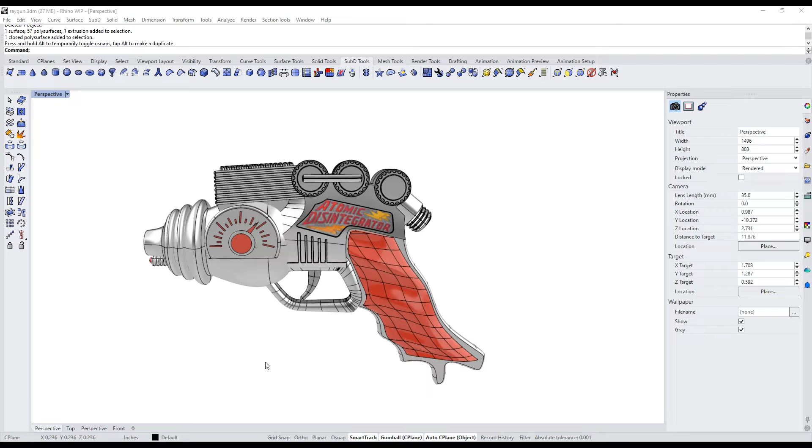Today I wanted to talk to you about one of the more exciting features of version 8, which is Shrinkwrap. I wanted to show you a workflow and how this tool can be used, and basically show the benefit if you're doing 3D printing, and also shelling, which used to be very difficult to do in Rhino, and it's actually super easy now.

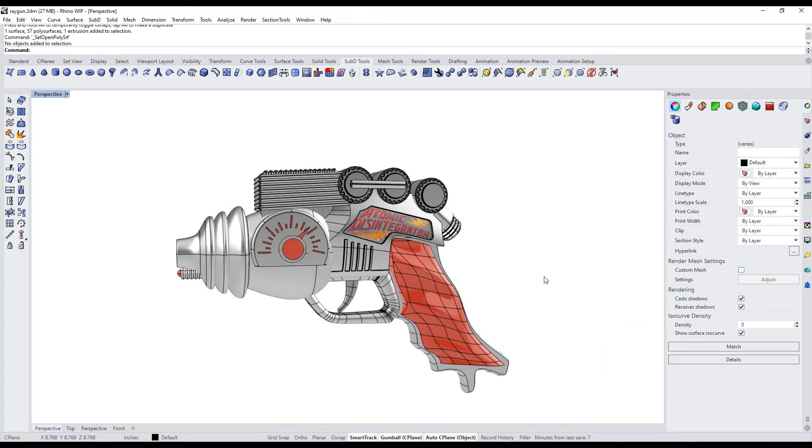So I've got this model, and you may recognize this from the version 7 days. I've dusted it off from one of the rendering videos. And the reason I wanted to use this is because this model's kind of a mess. If I grab this thing and run Select Open Polysurface, it's going to show you that this thing is open.

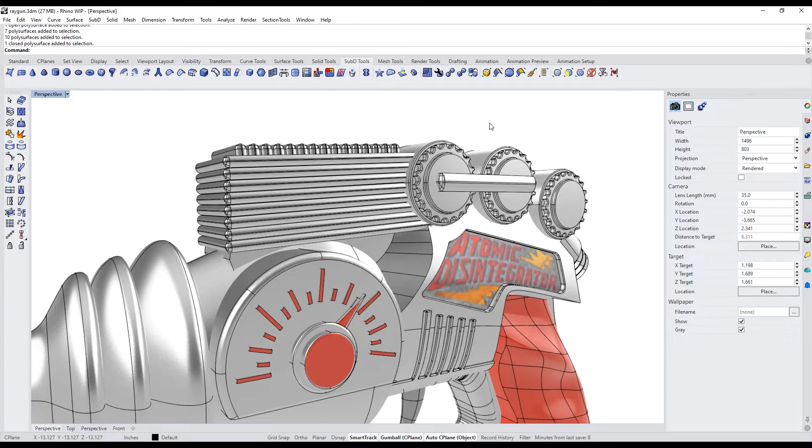It's got surfaces, it's got stuff that's just mashed and overlapping. Showing you a little bit of how the sausage is made here from some of my rendering videos. But this thing is not trimmed. It's got a bunch of overlapping stuff in two directions that I just mashed together for the rendering video, because I never really intended to do anything with this other than just make a rendering video.

But it actually turns out that this is a really good case study for Shrinkwrap. And if I decided at a later date, which I did, that I actually want to print this thing, it's a mess and it wouldn't print right now. I don't like how this thing is set up to do that.

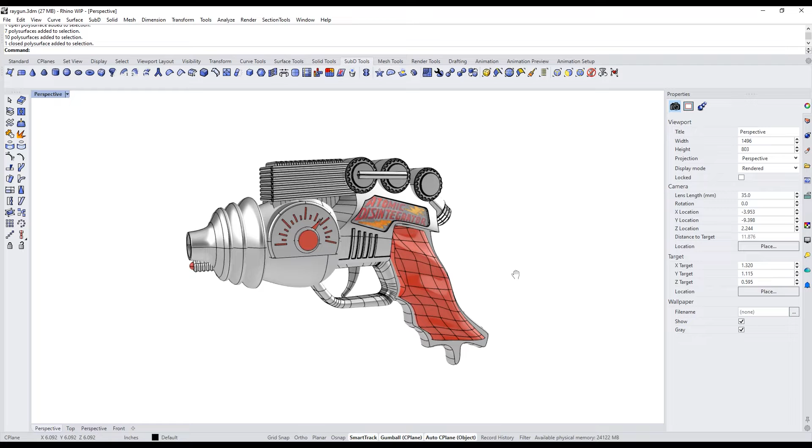So what we're going to do is grab the entire model, and I'm going to switch to shaded mode for this because it's a little easier to see. And we're going to run Shrinkwrap.

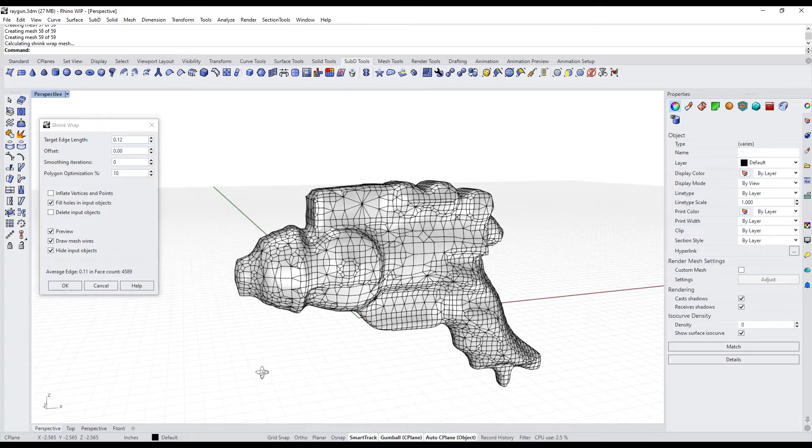It brings up a dialog box. The very first thing I'm going to do is hit preview and let it run, and then hide the input objects. You can see what it's done is made kind of a pile here. This isn't super useful, but the one thing you'll notice is it combined everything together into one piece.

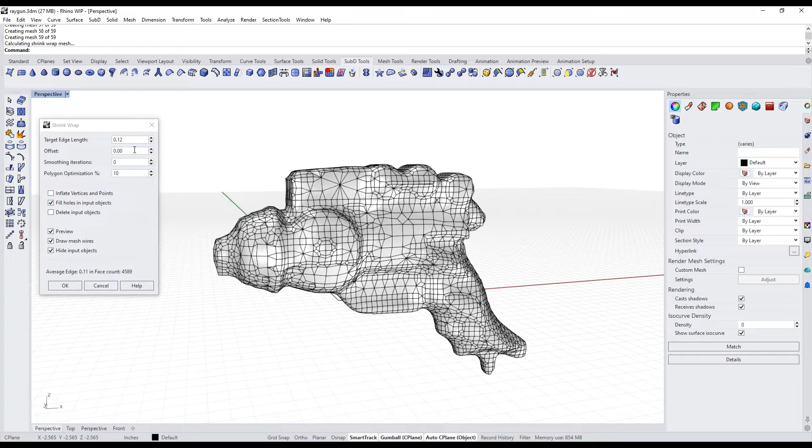So what we can do now is start to refine this. The first thing I'm going to do is actually not fill the holes, which seems a little bit counterintuitive, but I'm also going to crank this down all the way. I'm going to take this to 0.01. This is a fairly small model, so it's something we can get away with.

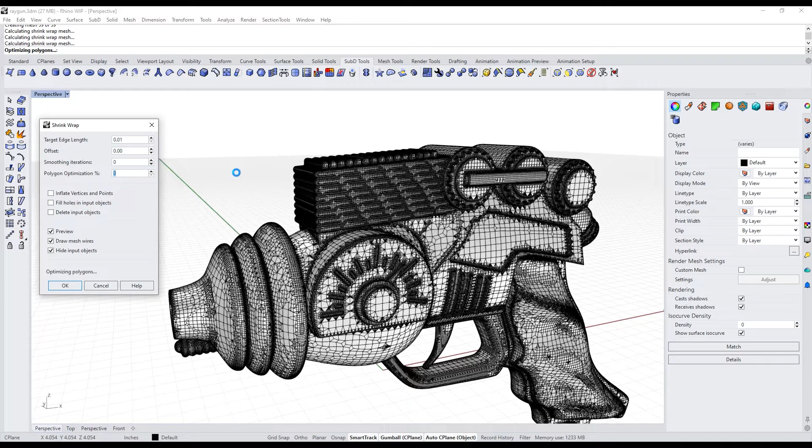And then I'm actually going to take the polygon optimization, which is a decimation, down to 0 because I want the full tilt boogie. I want to see all of the polygons. And we're going to go ahead and say okay.

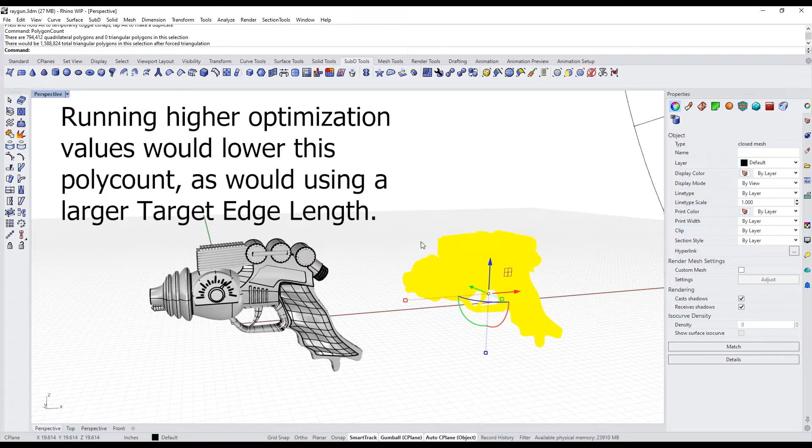Now, the cool thing about this is it actually completes fairly easily. And if we run polygon count, you can see that there's 1.5 million triangles in this part. Now that's rolling a little deep, but it's not out of the realm of any possibility for what any modern 3D printer can handle.

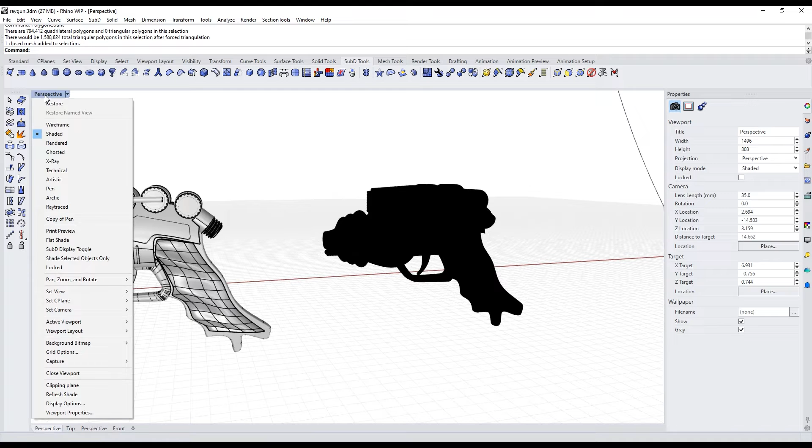We could always run mesh reduce on this. We could always do a bunch of things in order to get that to work. Now, if we go to rendered mode, you can take a look at this, and you see that's actually done a really nice job. But the coolest thing about this is it's a closed mesh. So right now, this chunk is ready to print.

Now, a lot of you may know I spent most of my career in the toy industry, and one of the things we used to have to do all the time with digital models is actually core them out in order to be able to put mechanisms or batteries or speakers, or whatever, inside. And that was always just an absolute nightmare.

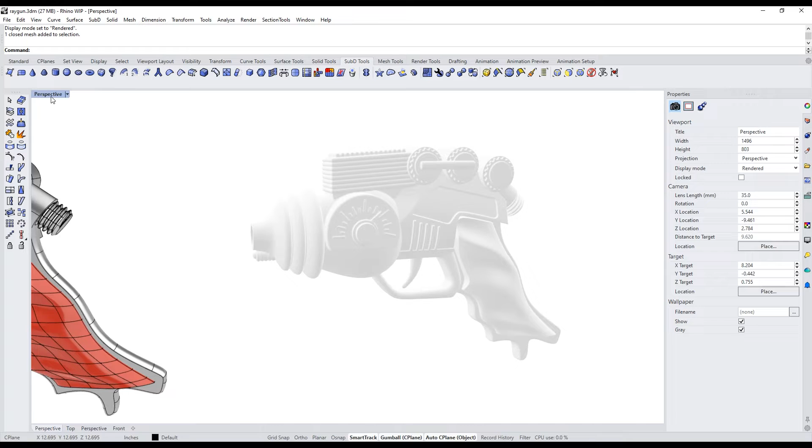In fact, there were tons of workarounds and tricks and all sorts of stuff that we had to do, and none of them were good. Especially in Rhino, this was really, really difficult to do because it essentially meant that you had to go through and individually offset each part, and then individually boolean the thing, and actually make a second model inside a model.

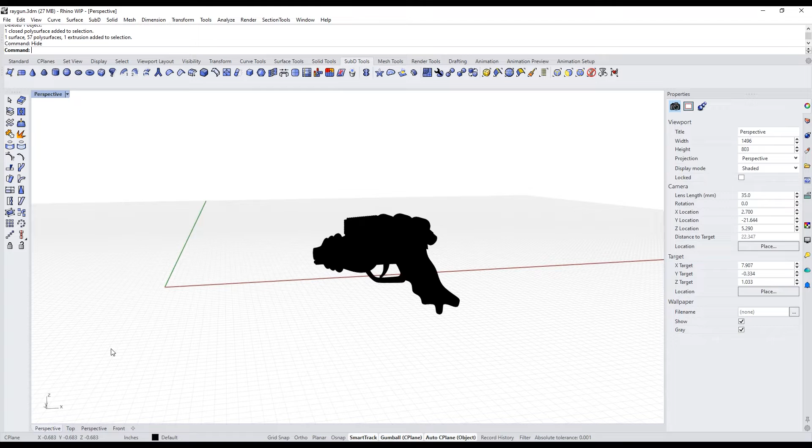Well, in this case, I'm going to hide this guy for now. What we can do is just shrink wrap the shrink wrap. I'm going to shrink wrap this, but I'm going to use the offset, and I'm going to actually offset this negative 0.08, which is about what I'd like to do.

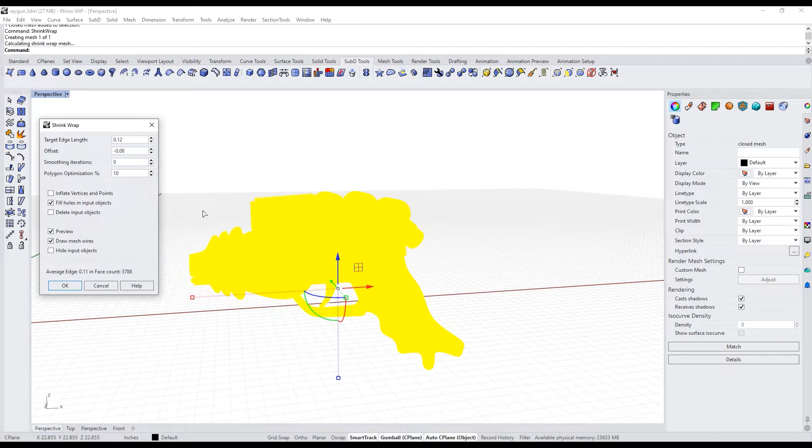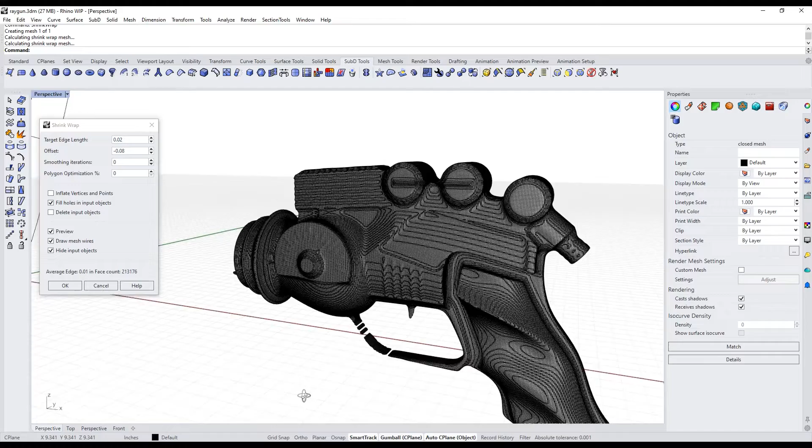I'm going to preview this, it's going to go fairly quick. I'm going to hide the input object, and you can see that we end up right back where we were before. So this is a highly optimized mesh, and if I crank this down to 0, you can see that it starts getting a little better. I can start cranking down or up the detail by making the edge length shorter, and then you see that I get a really good result of this thing as it sits.

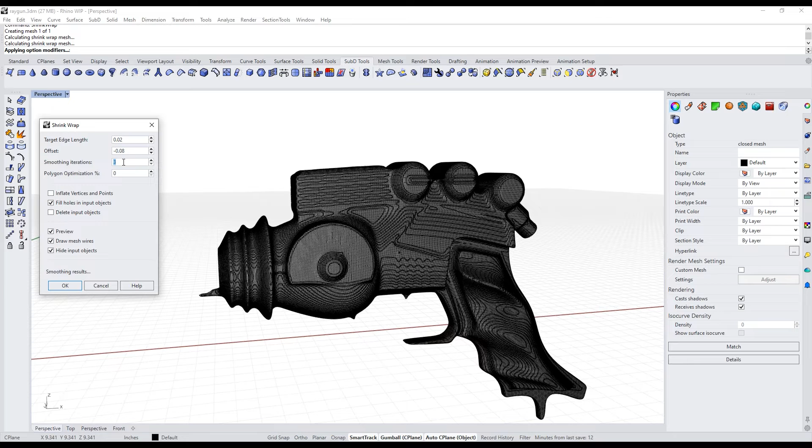Now there's a smoothing tool in here as well, so what I can do is crank this up a little bit and lose a little detail on the inside, which is fine — that's actually not a bad thing as far as what I want to accomplish. I'm going to go up to like 2 or 3, and I may add a little polygon optimization in here just because I don't need quite that much detail. I'll leave fill holes off again, and let it run.

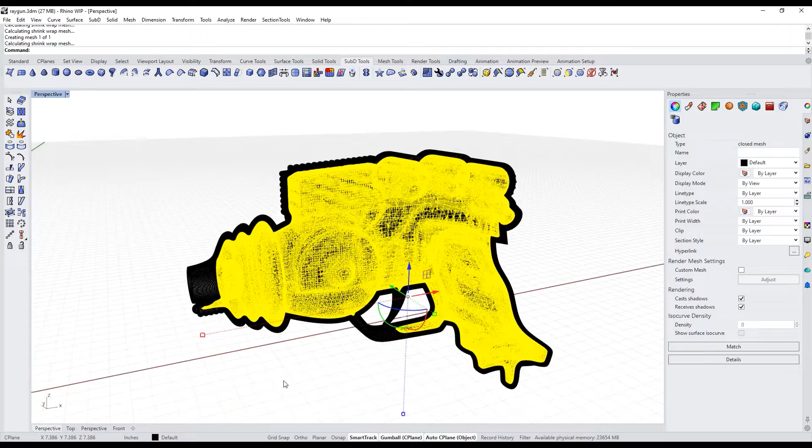So what you can see is I end up with this offset of my offset. Now, the last part of this...

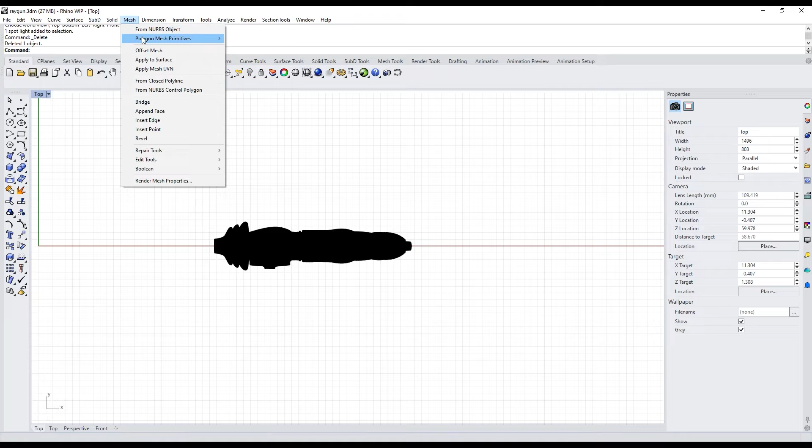Party trick that shrink wrap has is if I go into the standard toolbar and grab a mesh box — actually I'll do this from up here, grab a mesh primitive, and just do a box. I'm going to do it from 0, drag it out here, go to the front view, make it taller, and make sure that it intersects like that.

The other thing that's cool is that mesh booleans have been rewritten for Rhino 8, and they actually work now. Hooray! I'm going to come in here and grab a mesh split, and I'm going to grab this, the outside — I want to make sure I'm grabbing the outside. I'm going to split this guy in half.

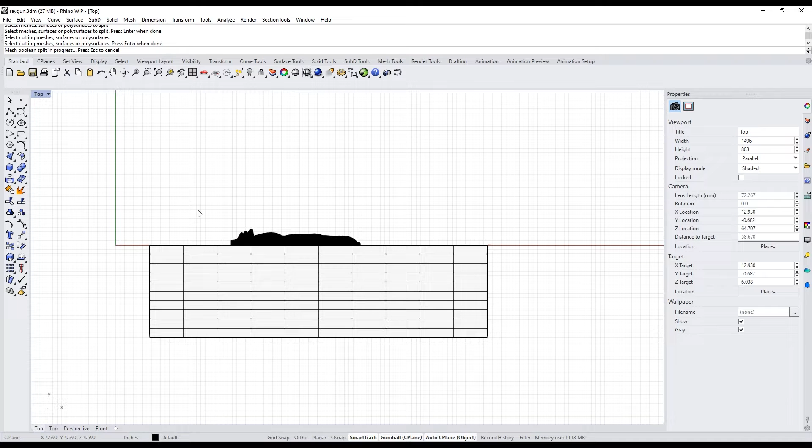And I think you can probably see where I'm going here, but wait for that to finish. I'm going to delete my box, and I've got two halves. Now I'm going to hide one half.

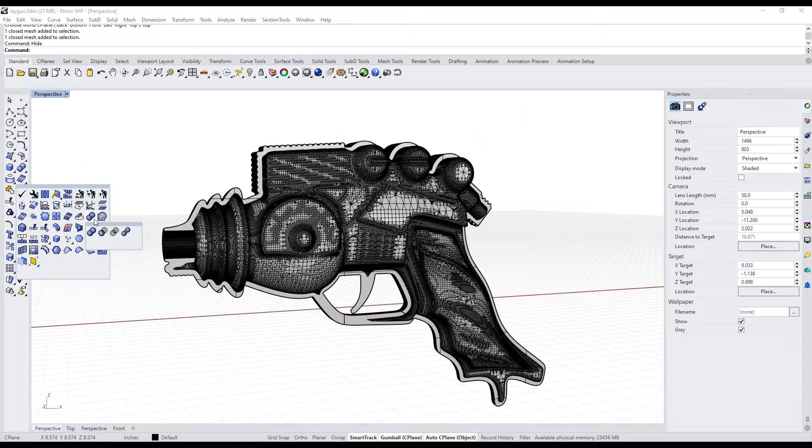You can see that the offset, I can check it, make sure that everything looks lovely here. I'm going to go and do a mesh boolean difference. I'm going to remove the inside from this. I'm not going to delete the input because I need to use it for the other half. It's going to think for a second.

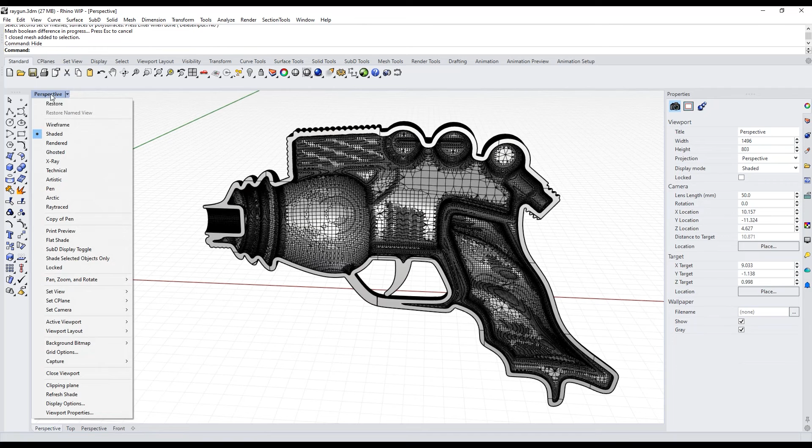I'm going to hide this so you can see it, and voila, we have a really nice shelled part. And because we ran a little smoothing on the inside, you can see that we actually lost a little detail inside, which is what we wanted — we wanted the inside to be a little softer.

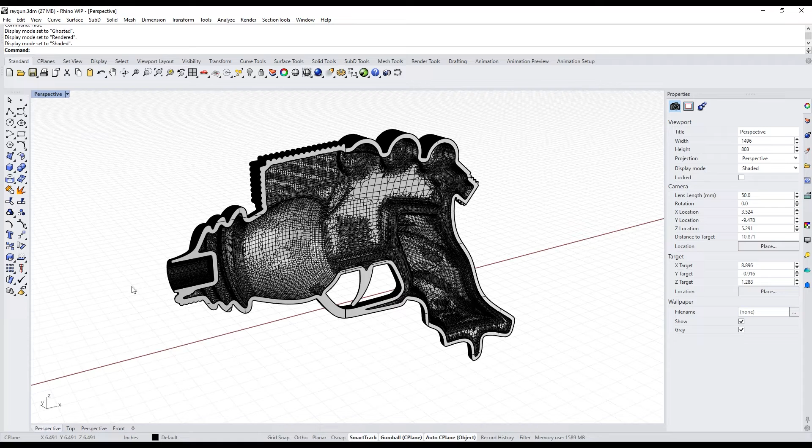This is what old people like me refer to as a wax offset. They used to do offsets in real parts — they would machine the cavity of the tool, and then for the core they would actually lay machinist wax of a certain thickness inside, and then pantograph that in order to get the other half of the mold, or the inside of the mold. It makes a really nice, what I like to refer to as a wax offset, which is nice and soft and easy to work with.

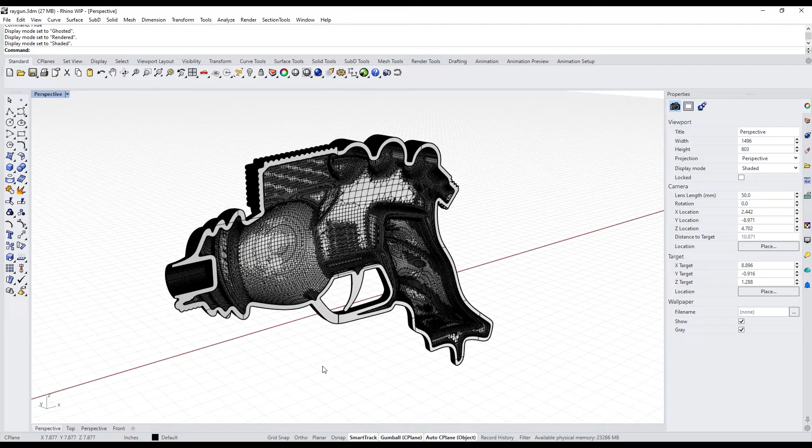Let's finish this up. So if I grab — let's just hide this side. I'm going to do the same thing again. I'm going to do a mesh boolean, not a regular boolean, and I'm going to do a difference. Pick this, pick that. This time I am going to delete the input.

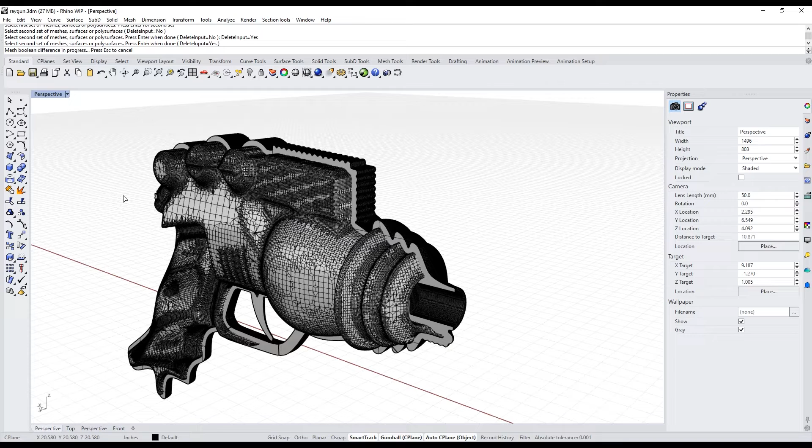Wait for that to finish. Bring the parts back, and I can pull this apart. And let's take a peek.

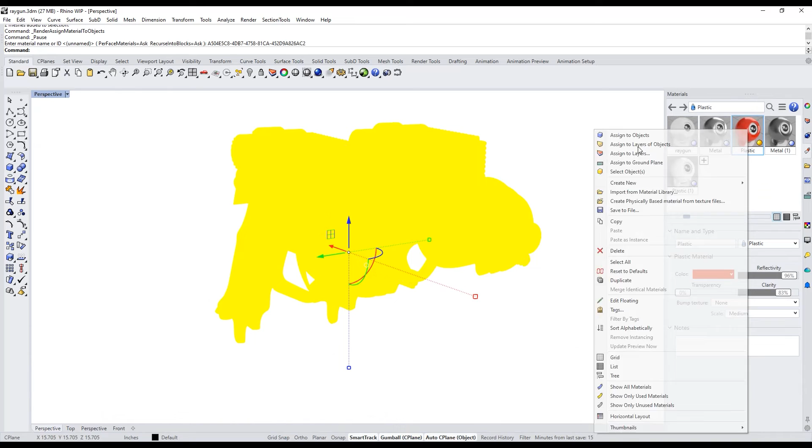Beautiful shelled parts, and white feels a little bit like cheating, so let's add a material to this, and that way we can kind of see really what's going on here.

Right? Nice detail. Now, because this is a voxel process, you're going to lose a teeny tiny little bit of detail in the corners because voxels don't make perfectly sharp corners.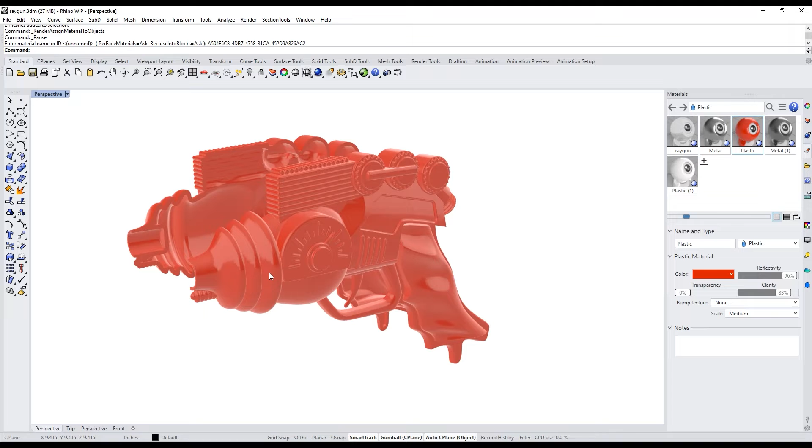But what I find is the detail loss, depending on the settings that you use in Shrinkwrap, can be under the tolerance of your printer, or by the time you get the thing out of the printer and clean up the part, even if you wash it in some IPA or whatever, like sanding supports off or washing an SLA part, or however you post-process this thing, whatever you lose is completely and utterly inconsequential.

The thing that's important is if I grab this thing and I run check, it's going to take a peek at these meshes.

These are good meshes. It's got two pairs of faces that intersect each other. That's zero issue. This is the thing that's important. It doesn't have any degenerate faces, no n-gons, no non-manifold, no naked edges, no duplicates. It doesn't have meshes with normal issues. It doesn't have any disjoint pieces and doesn't have any unused vertices. So this is a valid mesh.

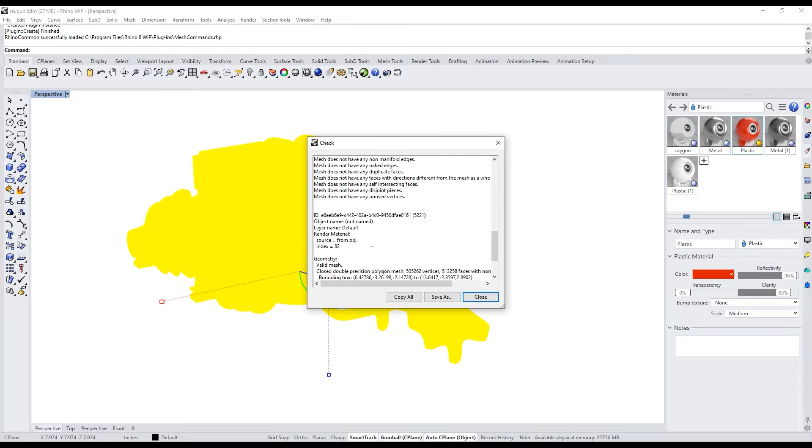And so this can go, same thing with the other one, it's pretty much the same report. So this can go to a printer all day long and go from there.

All right, so you can take this part, export STL, grab this thing and say file, export selected. We're going to set this as an STL. There you are. And we're just going to call it

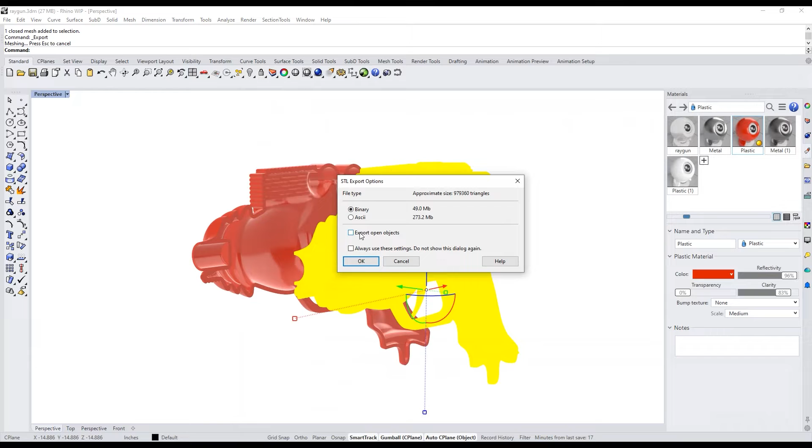ray gun. This is the left side, ray gun left, throw it on my desktop, and we're going to hit save. We're going to use binary because it's a much smaller file, and we are not going to export open objects. So if there is a problem, as long as this isn't checked, the export will fail. But because it went out successfully as an STL, this is good.

I do the same thing for the other side, and I'd import each part into the printer and then run them separately so that I can move them around.

Sometimes if you send out an STL with two pieces in it, you can't separate those two pieces, or you can't transform them separately within the printer software. So I always send out individual STL files for each part that's in the model. That way I can edit them and move them around and nest them and things like that in the printer.

So that's what I want to show for Shrinkwrap and getting a shelled part with a polygon result. The next thing I want to show you is what happens if you want a NURBS result.

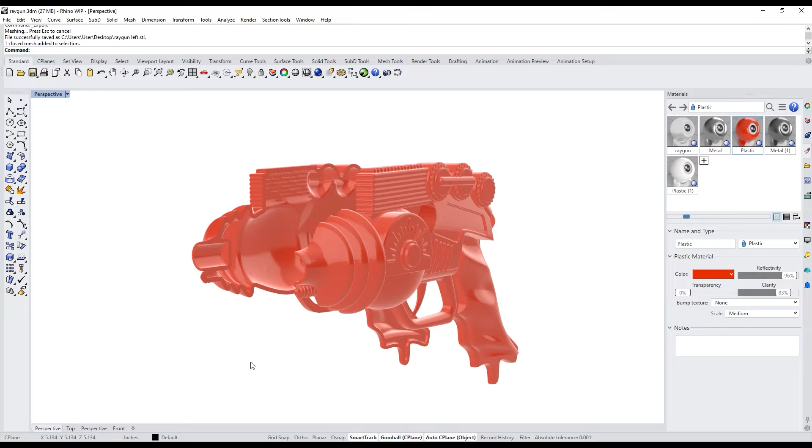Now I can hear what you're saying. You're saying, Kyle, but polygons are for nerds. What I want to do is have my model be in NURBS.

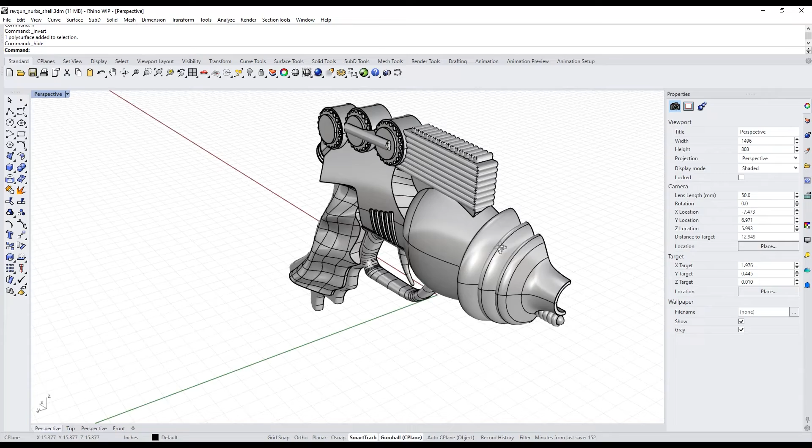Well, okay, so let's take a look at this. I Booleaned this entire object together, and I split it in half and I capped it. And this is where the story used to become really, really complicated before version 8 and Shrinkwrap came out, right?

In order to be able to shell this, you had to basically recreate all of these surfaces offset to the inside and then try and figure out how to intersect them and all that kind of stuff. And it actually ended up being something that was a line item when I had my consultancy.

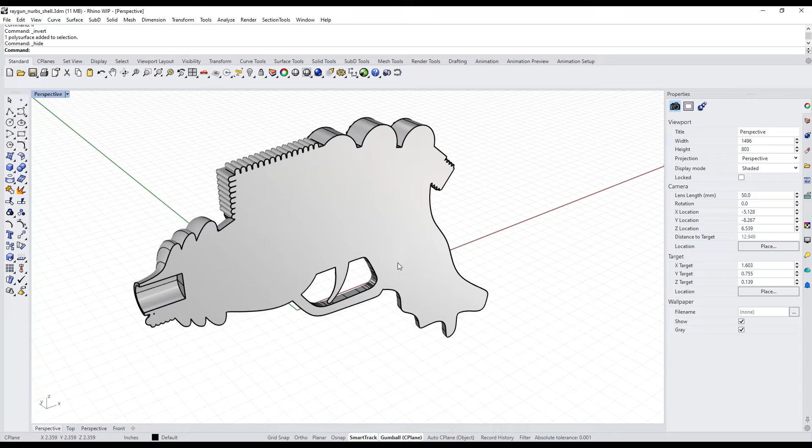If you needed a shelled part, it was like an additional day or two worth of studio time in order to be able to get that done.

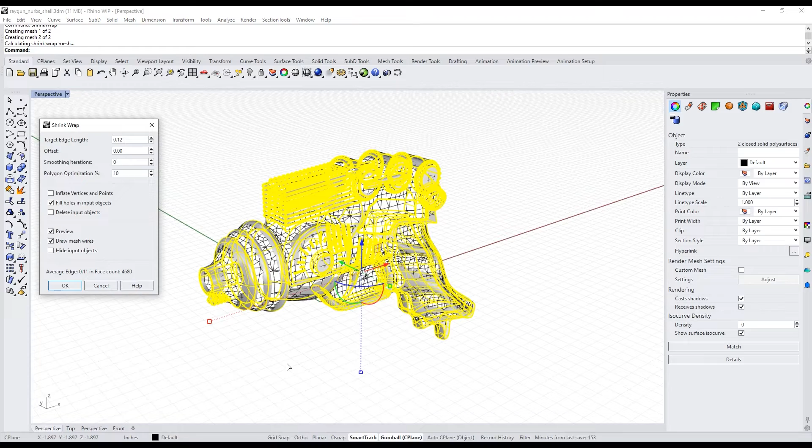Now, in this case, what we can do is bring the entire thing back together, and I'm going to just shrink wrap both halves here because it doesn't matter how we do this, or whether the parts are separated, because it stitches it all together for us already, which is fine.

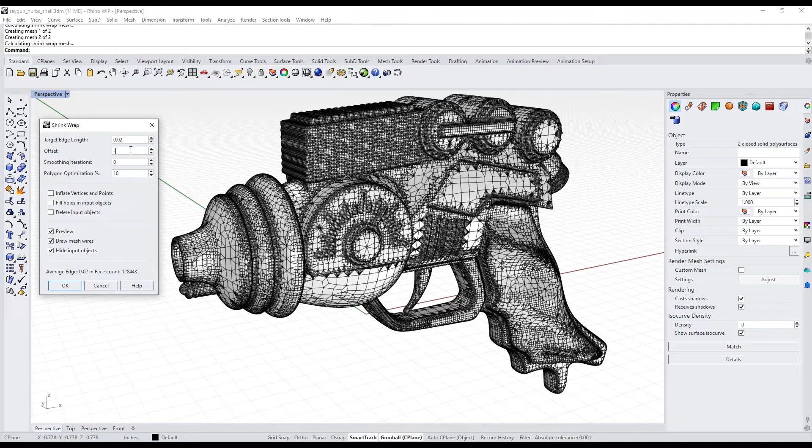I am going to offset it just like we did before, -0.08. That's going to give us our offset. I am going to smooth this just a little bit to clean up some of these little frags that are hanging out in here.

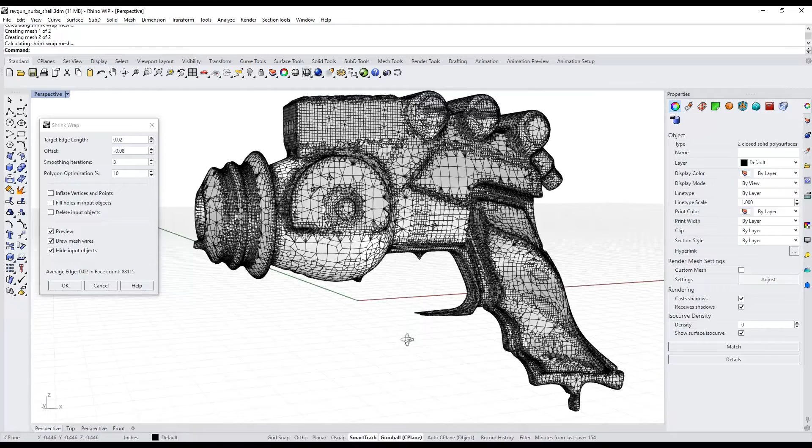And it looks like a value of 3 kind of gets us there, right? So what I'm going to do now is go ahead and accept this. I'm going to isolate it so we can see what it is, and take a look. You're like, great, that got us right back to where we were before. Like, why do I care about this?

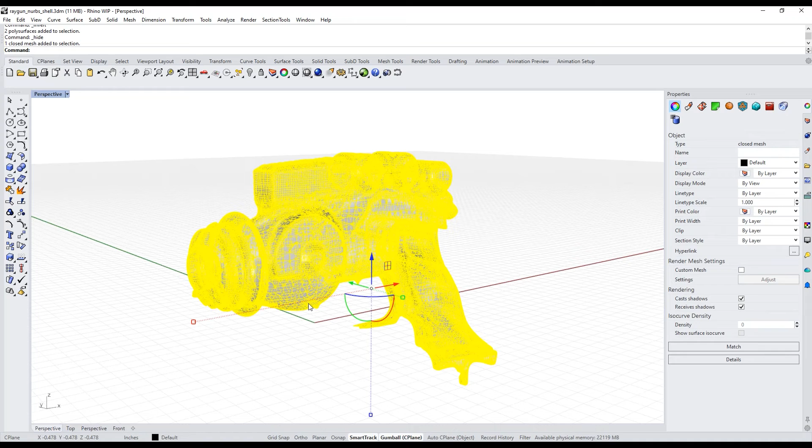Well, the cool thing that we added in V7 was quad remesh. And quad remesh allows us to take an unorganized triangle mesh and re-topologize it with quads. And you're like, great, why do I care about that?

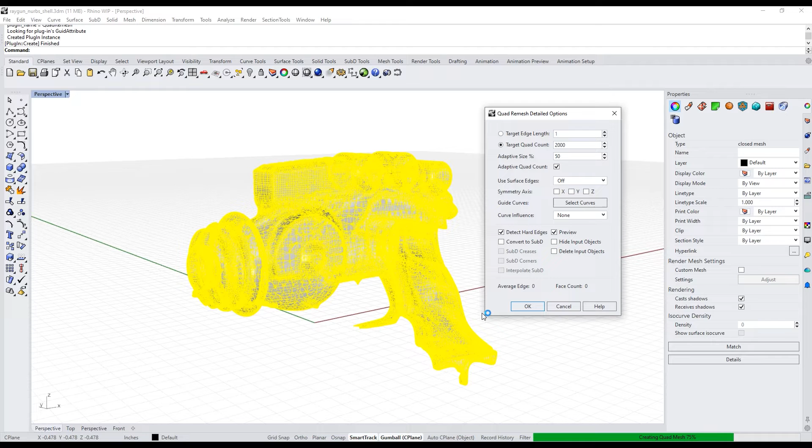Well, that's because from quads, you can convert to sub D. From sub D, you can convert to NURBS, which means that you can end up with a NURBS result of this core. Now, the cool thing about this is, let's just go ahead and accept it as this.

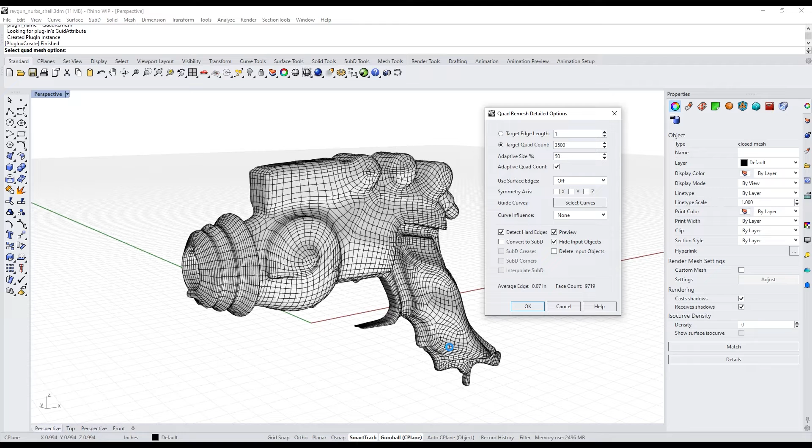Maybe we go just a little bit higher. Maybe we go like 3,500, just to get a few more details in here. Depending on how much detail you need, you can adjust the target quad count up or down to get a decent result.

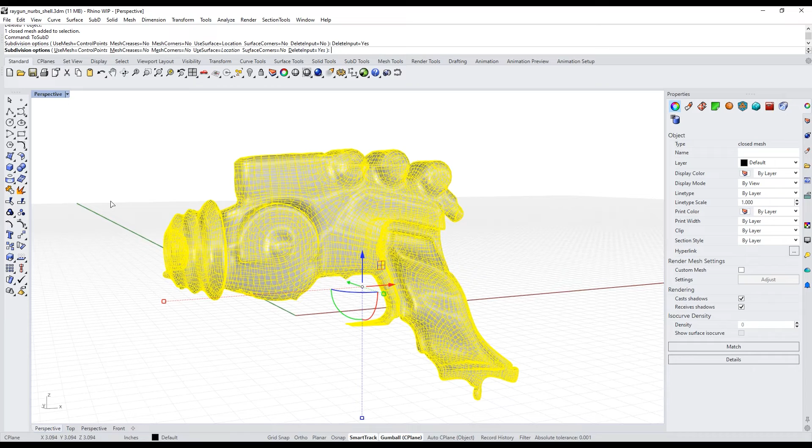All right, so let's go ahead and keep that. And I'm going to invert the selection. I'm going to just delete the mesh because I don't need it anymore. And then I'm going to use the to SubD command, using all of this stuff as default. I'm actually going to delete the input because I don't need it anymore. And you can see that we end up with a closed SubD part.

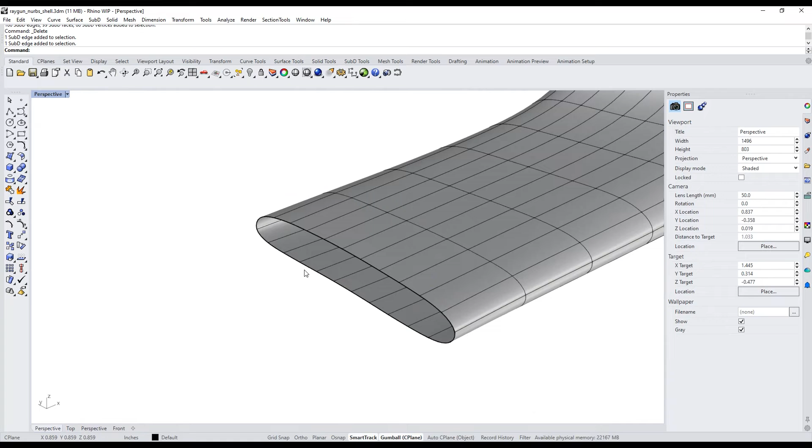Now, this is particularly cool because in areas like this, where this is kind of funky down here, we can just deal with that. Like any other SubD part, we could delete this stuff, and then we can bridge over these things and fill all that up. I'm not going to go through all that because there's plenty of videos showing how to do that.

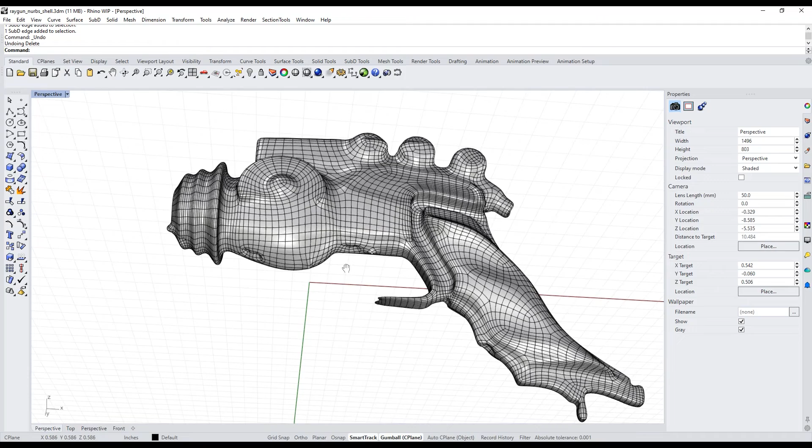But the point I'm trying to make is that you can actually go in and clean this stuff up. So if you see stuff that you don't like, maybe this little trigger nubbin in here isn't to your liking, you can go deal with all of that stuff because it's just a SubD, and all of the SubD tools you know work.

If you've got too much detail, you can just double click, get an edge, and delete the edge. You can selectively remove detail throughout the model, whatever you want to do, right?

So let's follow this through, and let's go to NURBS. We're going to delete the inputs, yes, and then for the SubD options, we are going to go ahead and packed it. G1 is fine. We don't need to get crazy with any of that, so we're just going to leave that set to the defaults with the exception of deleting the input.

And this is going to convert to, arguably, a fairly complex NURBS object, but it's actually very good quality. And because it's a NURBS object, because it's got high topological fidelity as far as the quality of the surfaces itself, it's something that we can go in and edit and deal with. And I'm going to just let this run.

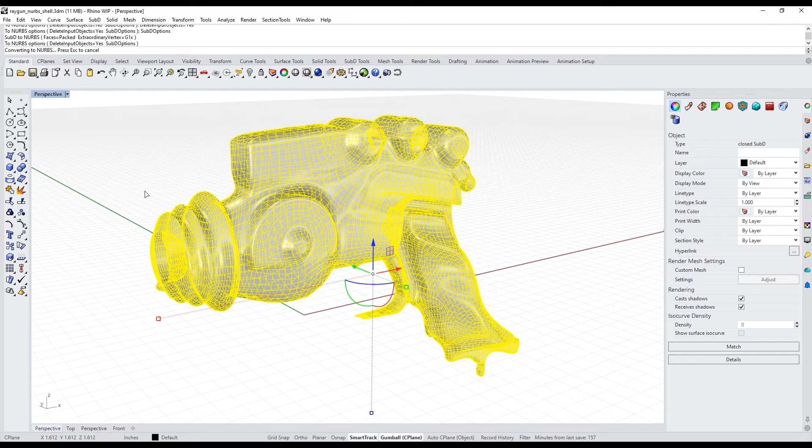It's finished up, and you can see that we end up with this fairly high density, from an isoparametric point of view. It's very high density, but it is closed and it's good to go.

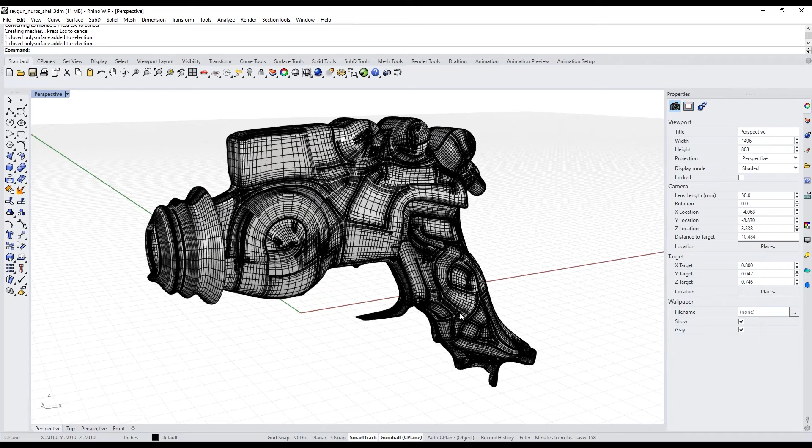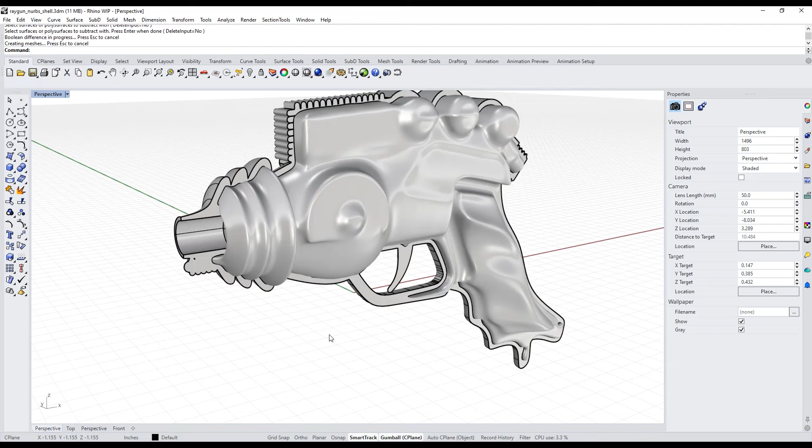I'm just going to turn off the surface isoparam so that you can see the result. Because it's high quality, if I bring this back, it actually booleans really pretty nicely. We can just take and do a Boolean subtract. I'm going to not delete my inputs. I'm going to bring my other side back. I'm going to Boolean subtract from this side.

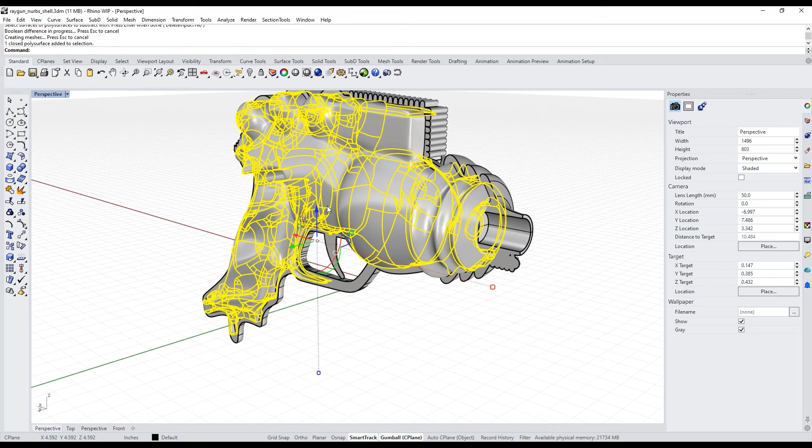Now, I would have wanted to fix this little nub down here, right? Because that's ugly. Obviously there's some common sense stuff that we're going to have to extrapolate here from this process. But what ends up happening is, and I didn't delete my input, so it was in there as well, is I end up with a beautiful... and I got rid of the wrong side.

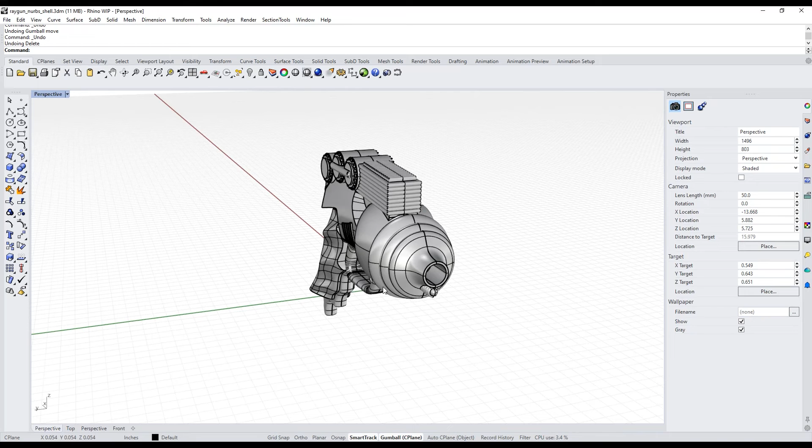That's the downside of not... I want to get rid of that one. You can see that we end up with a NURBS shelled part. And if I turn my edges off here, you can see the result.

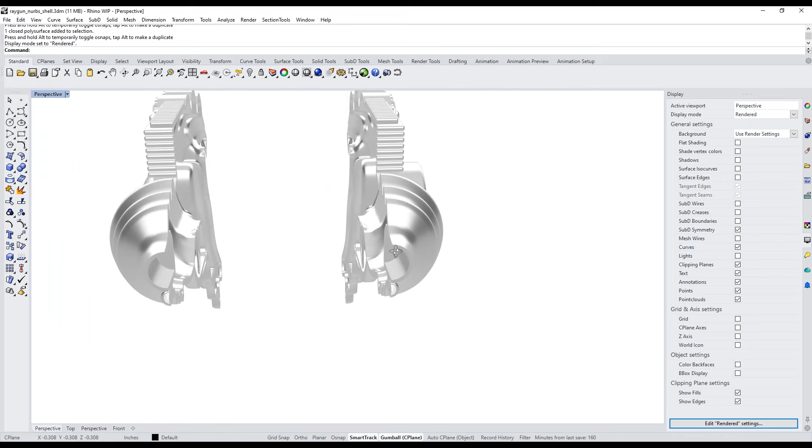Now, the cool thing about this is it's totally refinable at the subd stage. Once you go from Shrinkwrap to quad remesh to subd, once it's in subd, it's clay. You can mess with it and do whatever you want from subd. So I would refine stuff like these little nubbins. I'd fix all that kind of stuff, and I'd clean all that up so that the core was good.

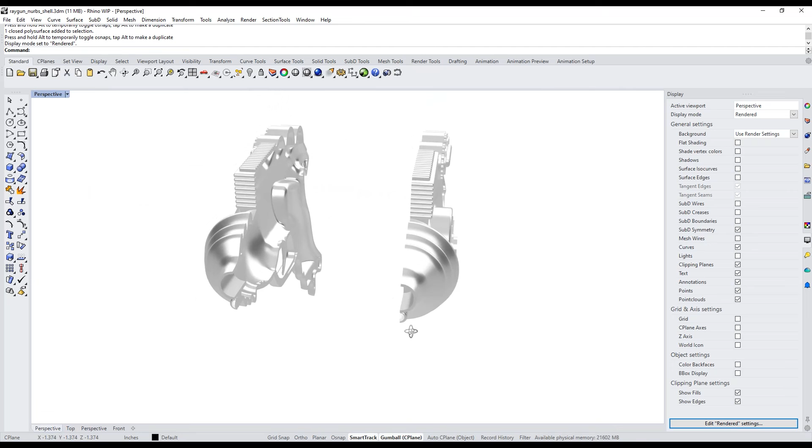But the process I wanted to show you, even if you work ugly, it works great. It looks really good. And this is something that if I pick this thing, it's a closed polysurface. If I pick this one, it's a closed polysurface. These are both good.

So I could punch this into SolidWorks. I could punch it into Pro-E. I could make an STL out of it and throw it to rapid prototyping if that was my jam. But the process is valid. It works on very complex objects. There's a ton of flexibility. There's a ton of opportunity to edit and refine and get exactly what you want as far as the core is concerned.

The question that always comes up is draft tools. There aren't any draft tools built into this process right now, so if that's something that's important for you, that would be something that you would probably need to address at the subd core stage after you went Shrinkwrap, quad remesh, subd. Once you're there, you'd want to run a draft analysis on it and identify any issues at that point and fix them there.

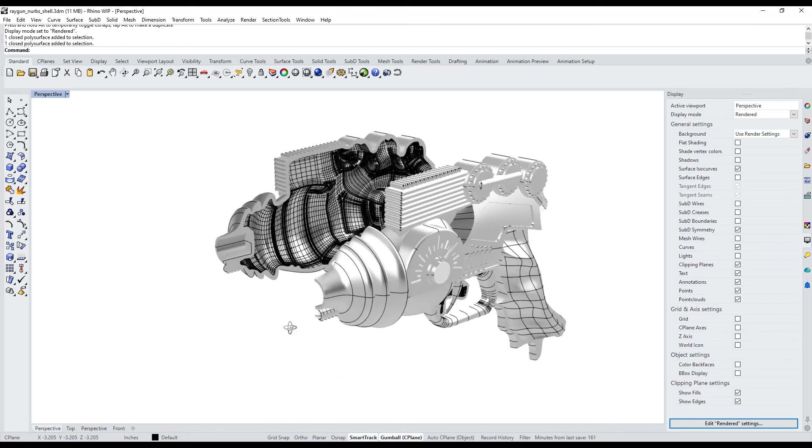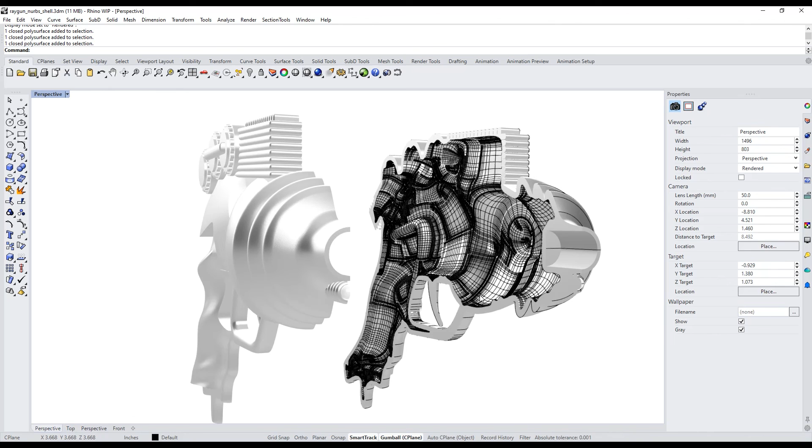Once you've done that, when you convert to NURBS, you do the Boolean subtract, and then you end up with this result, which you could take to whatever level of technicality that you wanted. Because these surfaces are very high quality, if you wanted to add ribs, screw bosses, battery boxes, anything like that, they would actually merge into this really nicely. So you could take this part and develop it further and end up with a really comprehensive prototype part, depending on what you wanted to do.